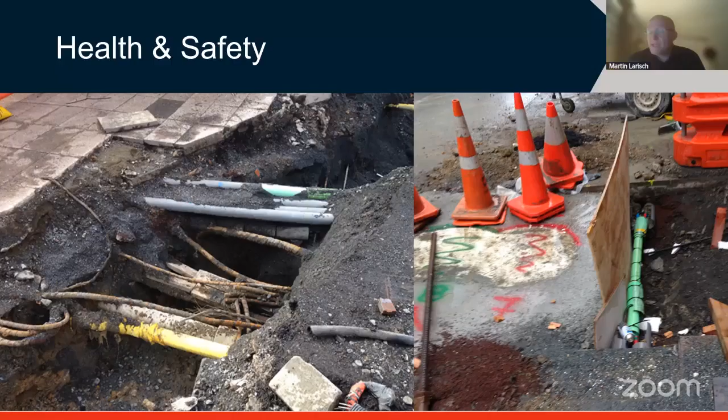I want to start with a bit of health and safety from own experience. We're drilling holes in the ground, and we have to make sure that we don't hit any assets or underground structures. I've worked mainly in Australia, New Zealand, and 5 years in Germany. But sometimes we find that the services are not located where they're supposed to be, and it can be very dangerous for the piling crew and the public to hit these services if undetected, causing significant damage to health and safety and to assets.

So really want to start at the basics. When do we need foundation piles? Usually in piling, we transfer structural loads into deeper and stiffer soil or rock layers, and we want to achieve an adequate load displacement behavior of the foundation. We only use piles for foundation of structures if a shallow footing can't provide these load displacement behaviors, whether under static or seismic conditions.

We will look into basic piling techniques used in Australia, New Zealand, and probably around the world. I really focus on bored piles and driven piles, and just explain the main design and construction principles.

Based on my own experience, I'll also highlight what can go wrong, how we can significantly over and underestimate the pile behavior, and I'll try to provide a perspective on the influence of installation effects and pile verification methods. Many years ago, I did my PhD on pile installation effects, because as a young engineer I was on site and couldn't understand, on some projects...

We did the thorough design, the thorough investigation, the thorough design, and then we did the testing. The pile load test results were different than expected, even though the ground conditions were similar. We back analyzed the load testing results and saw that in certain soil layers, the soil resistance was significantly lower than expected and lower than in textbooks. Then I did a lot of trials and finite element modeling to find out what happens, and I will share a few of these findings today.

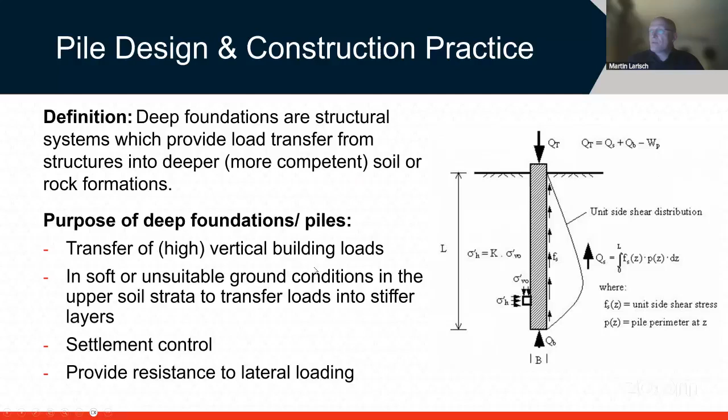If the piles are spaced adequately, usually 2.5 to 3 times their diameter from center to center, they will act as individual piles, transferring the load through shaft friction and end bearing.

We can have combined pile groups. It's a bit more complex, so I won't cover that. We call them mixed foundations, where the underside of the slab also contributes to the load transfer. However, this requires that the settlement of the piles and the slab is the same. If I found my piles in rock, they'd have a much stiffer response, and a pile-raft foundation wouldn't work, but we won't cover that.

Then we have rigid inclusions, a ground improvement method that Dr. Derek Egan spoke about in a previous lecture. Even though we install concrete columns with piling equipment, with rigid inclusions we don't connect them to the structure. The structure is designed with a shallow footing, and there will be a gravel raft between the underside of the slab and the top of the inclusions. The rigid inclusions improve the ground, so typically these elements are not directly connected.

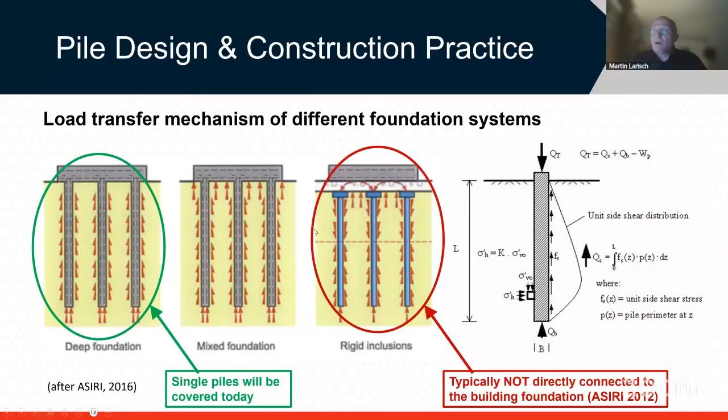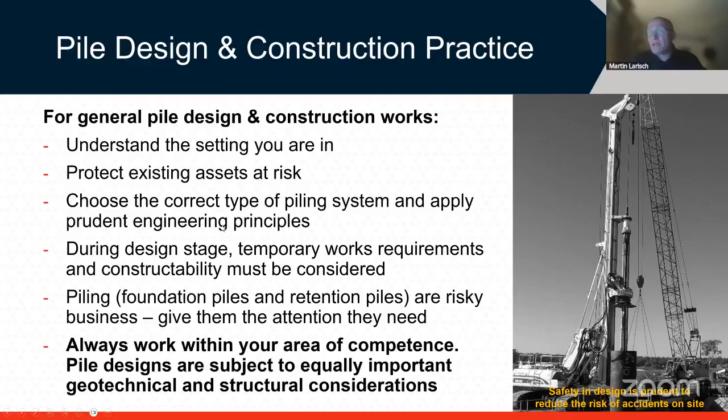If your structural competence or geotechnical competence is still fresh, reach out to your colleague or your boss and ask questions, and don't overestimate. Be brave, be bold, but also be very careful and use the opportunities to learn.

Starting with ground conditions: what's the complexity of my site, the geotechnical complexity? If I don't have any boreholes, this is probably a high risk, and I have to rate that. This affects my geotechnical strength reduction factor, or my factor of safety. The more risk I accumulate across these, what are 8 different assessment types, the higher my risk and the higher my factor of safety. It's a really good assessment.

The same thing applies to the extent of ground investigation. One example: sometimes we went out on a piling job and did deep piles with rock sockets. We did a lot of investigation of rock, but then for certain instances the building changed and we had to use stone columns or ground improvement. The rock was not of interest because the stone columns would not penetrate into the rock. So we had a lot of boreholes with rock socket samples, but no meaningful investigation of the soil above that. So even though the extent of ground investigation was high, the amount and quality of data for my task was low. Really assessing these things matters.

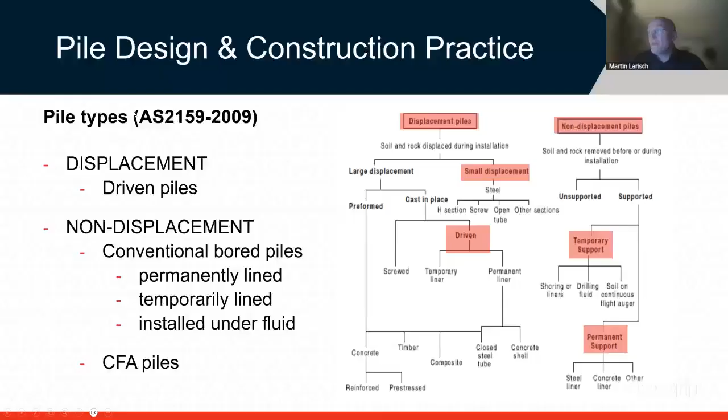Contrary to that, non-displacement piles like bored piles - you drill a hole in the ground and relieve the stresses - in these cases you may get lower strength, you may reduce the initial strength of your ground, and then you have to think about the support, which we'll talk about later on.

I don't want to get too much into ground investigation, but a rule of thumb is it's good practice to go about 3 to 5 pile diameters below your anticipated pile toe level. You may think, hang on, I don't know how deep my piles are going, I haven't done a design. But even if you start somewhere, do an initial design - if you have your values for a 10-story building, you know from experience, for example, I have 50,000 kilonewton overall load for a building like that. You have about 100 piles, you divide 50,000 by 100, so 500 kilonewton per pile.

If you know your ground condition, you can say, yeah, about 10 meters, 12 meters deep. And if you then say, look, your boreholes, probably assuming piles 600 millimeter diameter, if you go 3 meters deeper, you go to maybe 18 or 20 meters, or a little bit deeper depending on your ground conditions.

And maybe stagger your investigation. Tell your client, look, I use 60% of the budget for an initial investigation. And then when we find areas and pockets where we say, oh, we have to go back, we take the rest then. So this is very important. We can use boreholes, we can use cone penetrometer testing or other methods.

Usually, if we get boreholes deep enough, we get information about soil types, soil layers, groundwater, any areas where we have core losses, where we don't retrieve any soil samples. Could be a layer of cobbles or very soft soil. That's very important for the designer.

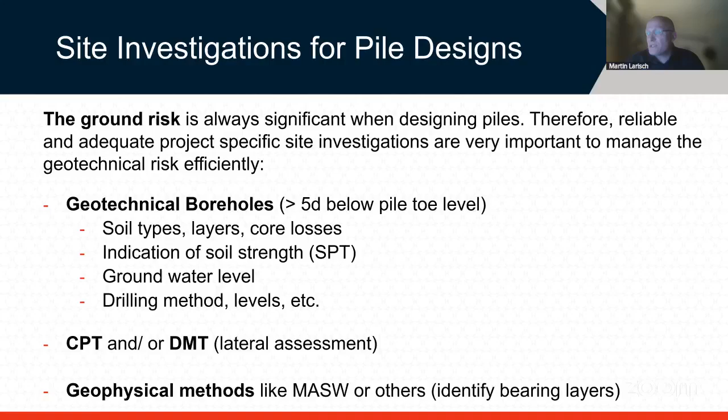The key parameters for my axial and lateral pile design is really I need to understand my soil type. Is it granular or cohesive? How many layers do I have? What's my soil behavior? Is it drained or undrained? Usually for long term, I would always recommend to use drained behavior.

Liquefaction risk if we're in seismic areas, if applicable. And I just noticed that there was a 5.0, 5.6 earthquake in Brisbane earlier today, and I worked in Brisbane for 12 years, and there was always saying, no, there are no earthquakes in Australia. And I went to New Zealand, everything is designed for earthquakes with big seismic hazards here, but Australia is not prepared for that, so they suddenly probably have to start rethinking and say, look, what is it? What does it mean? A 5.0 earthquake will trigger some liquefaction. But again, that's a different story.

Soil cohesion, I would usually assess cohesion with great care because it can be variable. It dominates strength at low depth, close to the surface. If your cohesion values are too high and you get a rain event, or your soil due to movement, the stiffness weakens, then we may get lower values, and that could be less beneficial for your pile design.

Sometimes we need soil permeability, mainly for durability assessment, if you have contaminated water or salt water that may attack the pile material, the steel or the concrete. Poisson ratio in some instances, on the soil model if we're getting more sophisticated.

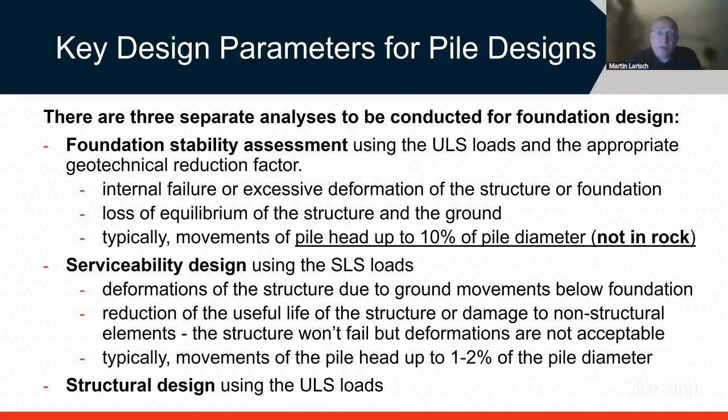It's a more complex question, but my first consideration would be to address this in your site investigation, and then design your basement accordingly. I hope that's helpful.

If we look at the fundamentals of axial pile design again, that was the foundation for a high-rise building with 2.4 meter diameter piles.

Dr. Martin, can I interrupt? Just to remind you that the continuity of the lecture is important, but questions are also important, so wherever you feel a question should be answered, you're free to answer it, or it can be addressed later during Q&A. Whichever you prefer is up to you. Okay, thank you, perfect.

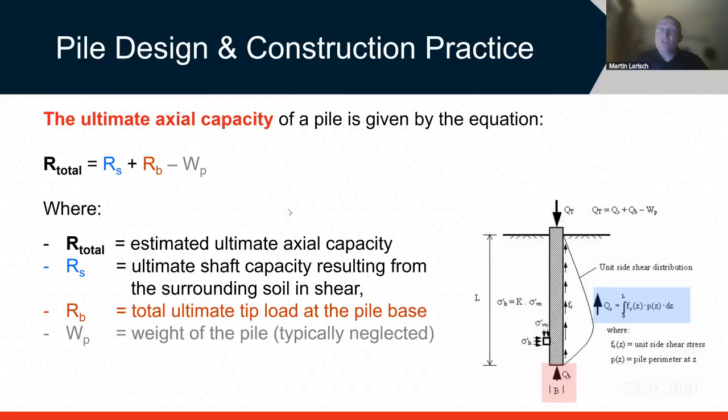All right, if we then look at the basics of effective stress design of axial pile capacity: my total geotechnical resistance is my shaft capacity resulting from the surrounding soil in shear, plus my ultimate tip or base load. I have to deduct the weight of the pile, but very often that's neglected in my experience.

If we look at limit state design, my R_g, which is my geotechnical resistance of the pile, is similar to my structure design action effects. This should be the product of my geotechnical strength reduction factor, which we often start at 0.5, multiplied by my ultimate geotechnical pile resistance. This shows the importance of the geotech strength reduction factor.

If my structure load is 1,000 kilonewton, with a strength reduction factor of 0.5, my pile needs to be designed for 2,000 kilonewton geotechnical ultimate resistance for ULS. If I do some load testing and increase my strength reduction factor from 0.5 to 0.65, I only need 1,540 kilonewton resistance. Depending on soil condition, I can cut out about 25% of resistance, so in some ground conditions that could mean I shorten the pile by 25%. Instead of a 20-meter long pile, I may only need a 15-meter long pile, which can provide significant savings for the project.

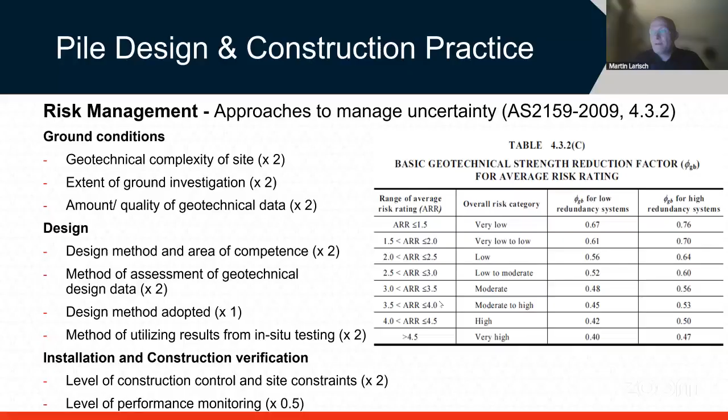If we look at shaft resistance for axially loaded piles, this is usually the first component of resistance to be developed. Initially the shaft resistance is elastic, fully recoverable, and normally in soil, if we get 1 to 2% of the pile diameter in downward movement, we fully mobilize it. Again, it's a rule of thumb, not a fast rule, just an estimate that needs to be confirmed by load testing, but it can vary in different ground conditions.

If I make an allowance for certain shaft resistance, how do I verify that, particularly in rock and soil for bored piles? This very often happens through verification and rock socket cleaning, which can make a very big difference. For continuous flight auger or CFA piles, it can be the penetration rate. As a designer, I always start thinking, particularly if my pile design is a bit more aggressive, how do I verify that on site? Again, it's a risk - if I use more aggressive parameters, I need to make sure I can verify that on site. Just assuming I can use aggressive parameters without verification is a risky game.

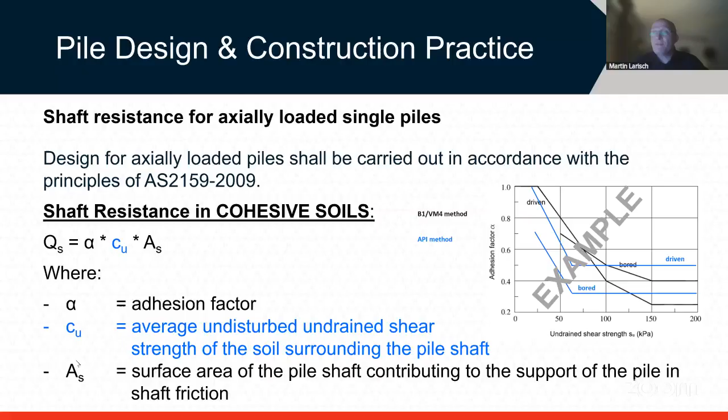This is very important to consider in pile design. The methodology and the standard and the safety concept you use can have a significant impact on your pile design, even if the formulas are so simple like the alpha CU method.

If we go into granular soil conditions, we have the beta method. It's basically an effective stress method. So we have effective pressure at shaft midpoint, and then we have the average value of pile-soil friction angle and the coefficient of horizontal stress. There are some values from, for example, US Army guidelines or other codes and standards, and we can lump this Ks multiplied with tangent delta to a beta value.

The key thing here, which is very often forgotten, is this is effective stress, and it needs to be equivalent to or smaller than your limiting value of shaft resistance.

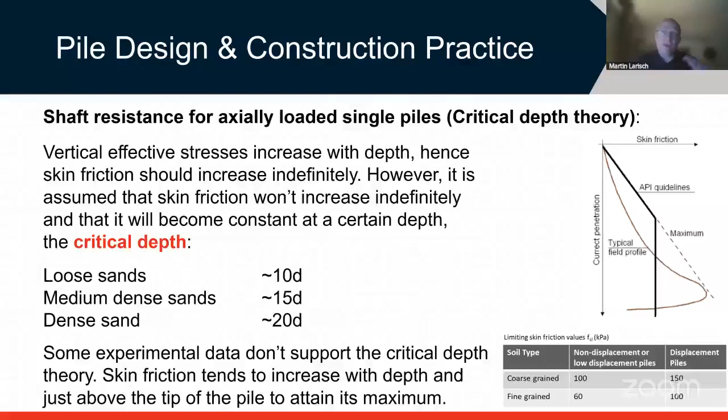There's other research, the brown line, that shows basically the resistance at the toe is almost like the effective stress over a short period of the depth. But if you would consider the area beneath the curves of the black one and the brown line, it would be approximately the same. So again, it's really important to consider these limiting values for effective stress design.

And we will come to the selection of NQ parameters in various ground conditions for drilled shafts in a minute. We then look at end bearing for axially loaded piles. That's usually the second component of resistance.

Its nonlinear behavior can be more tricky to model by linear elastic soil models. Usually it generates bearing failure, and we say it's about 5 to 10% for driven piles, and could be up to 24% for bored piles. The reason for this variability is that with driven piles, we can improve the ground conditions beneath the base by installation effects.

It's not always possible unless we can prove it. I would not allow for it in the design. The key things for me as a pile designer are really, how do I verify particularly the cleanliness of the pile base? If I have 200 mil or a foot of base debris sitting on my pile, and then I pour concrete, I have a sandwich, and when the pile gets loaded, the shaft friction is mobilized, and I'm waiting for the end bearing to mobilize, and the pile has to squash through a foot of debris, it will move. This is really, really critical.

Or verification of set and temporary compression for driven piles.

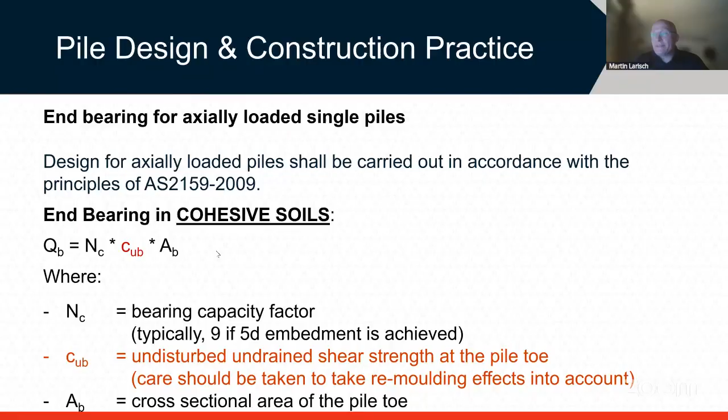We look at end bearing in granular soils, and we look at the NQ values, the bearing capacity factor, empirical. It's a function of the bearing capacity factor and the vertical effective overburden pressure. And if we look at different authors, different publications, these NQ values can vary significantly. Again, this is the estimated resistance based on the bearing capacity factor.

Keep in mind that using these values, for example, if I'm in dense sand, my bored pile is 1 meter in diameter, then I take the area of my bored pile multiplied with 5. But that means my pile needs to move about 100 millimeters when founded in soil in order to activate that. If it can only move 50 millimeters, for example, because otherwise the building would be damaged structurally if the movement would be too high.

This needs to be reduced. We see that a lot in earthquake engineering, when due to soil liquefaction the shaft resistance basically disappears, and all the load will be transferred to the base, so we may get bigger settlements, and the structure needs to accommodate that. So this is one of the key things.

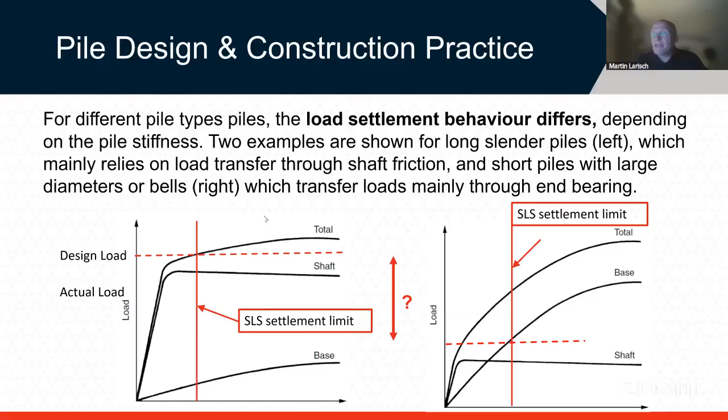Again, it depends on my structure, my loading, and my ground conditions. But again, the formulas themselves don't have to be complex. It's probably thinking around it, how do I accommodate that best and make that work for my building.

And so that means above the neutral plane, the settling soil will hang itself onto the pile and basically drags it down. So I get additional loading from these ground conditions. When can that happen? Newly placed fill materials, so reclamations very often, or fill on compressible soil. If I have an embankment of 5 meters high, and a very soft soil below, it can settle due to the additional loading. And if I have piles for bridges, for example, the settling layer can apply down drag forces.

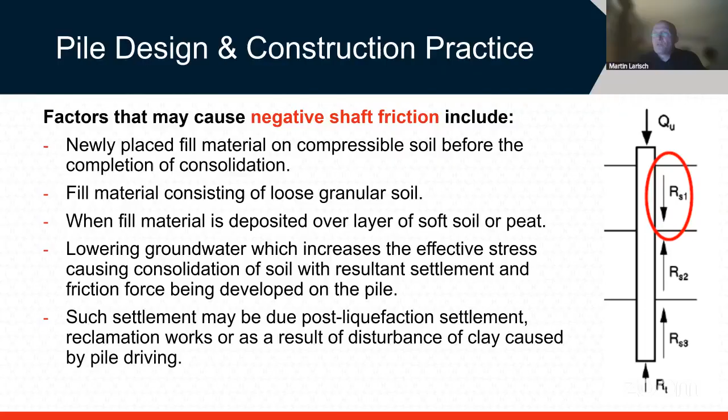So we will introduce an additional axial force in the pile - it's drag force - and this can cause additional settlement. Usually the capacity or strength is not affected, it's more a settlement problem. So it's an SLS problem because we will increase the settlements. And we also need to consider this additional down drag force in the structural code. For example, AS 5100, the Australian bridge code, we have to apply a factor of 1.2 onto my down drag forces, and that needs to be allowed for in the structural design. Drag settlements should be considered in the SLS assessment.

Very briefly, what we can do is apply bitumen coating in areas where we expect the layers to settle, so we won't get a lot of shaft friction for resistance. But on the other hand, if we have down drag problems or negative shaft friction, the soil can't hang itself onto it, and we basically have an almost neutral section of pile in these layers. We can also put some sleeves around it, like we see here.

Again, there is no right or wrong, it depends on your project. Sometimes there's a bit of hesitation when we say, if you put bitumen on your piles and drive them, particularly in sand, won't you rub it off? Again, I've seen that a few times where when we extracted the piles, they looked pretty good. So again, there's no right or wrong, but as a designer, considering that, thinking about that is very important.

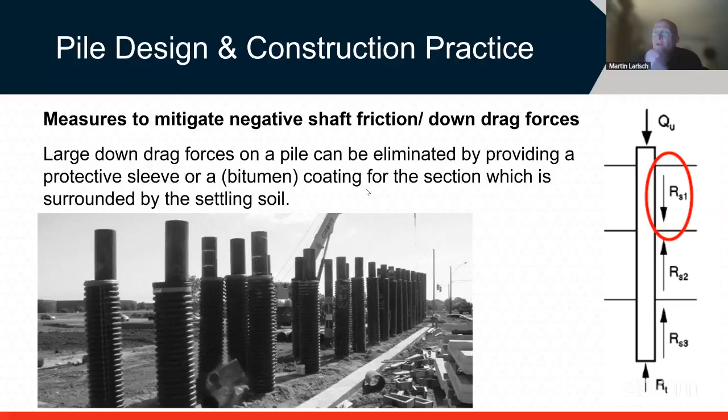A bit of a summary of axial pile design. In your selection, include structural and geotechnical considerations, constructability effects - we'll talk about that shortly - and any project-specific boundary conditions. Understand your settlement limits. If you don't understand them, just develop them. You need to know your pile settlement limits.

Understand the difference between drained and undrained pile design. How reliable are your design parameters, and how realistic? How robust is your ground model? And if you do your sensitivity checks, understand the behavior of your pile foundation. What is your contingency? What if the ground is far worse?

Understand that in your design. Pile design strongly depends on local geology and site-specific installation effects. Ensure your risk assessment covers these risks. And again, verification of design through pile load testing may provide considerable advantages, not just for the designer to know that their parameters and settlement assessments were right, but also for current design and future applications.

All right, if we look at rock socket designs, I've done a lot of rock socket drilling, mainly in Australia. Where we have rock sockets, very often we ignore the resistance of the soil above the rock for the pile design. One reason is that usually the rock provides much higher resistance, but another, more practical reason, is the pile needs to move far less in the rock in order to fully mobilize the resistance. So we're not talking about 1 or 2%, it's far less.

This means if my pile only moves a little bit, maybe 20-25 mil - which is usually, in my experience, what we allow for SLS settlements in soft rocks at least - these settlements can be very small and the response is much stiffer. So the soil above the rock socket is really not mobilized adequately. Typically rock strength controls the skin friction and bearing performance, so strength is usually used for the design of rock sockets. But if we really look into it, depending on the project risk, we also have to apply rock modulus and other parameters.

The key thing with rock socket design is really to have clean pile bases. If we have debris due to drilling, if the contractor doesn't clean out the base properly, that won't reduce the bearing capacity of the rock because it won't damage the rock, but it will create additional settlement. If you have a layer of 200, 300 millimeters of debris, then your pile's shaft friction is maxed out and it goes into the ULS case. This is when your pile needs to work hard, like your life insurance. It needs to move 100, 200 mil to compress this soft layer. Ask the structural engineer what they think about another 100 or 200 mil of movement.

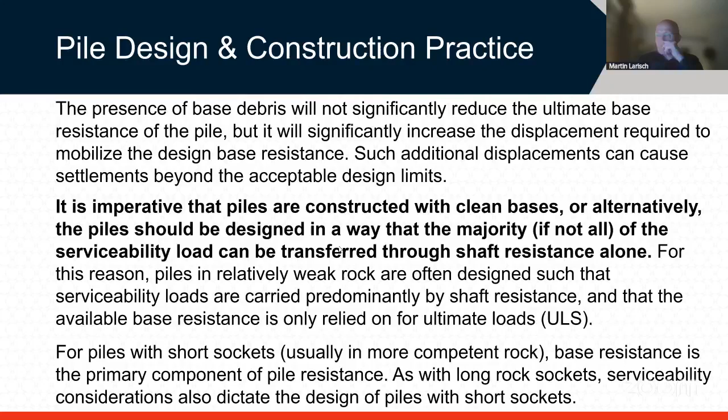The roughness of the rock socket is very important, and again we should think about evidence. How do we rely on that? If we have dry rock, we can lower a mirror and look at it, or lower cameras down these days. If we have bentonite fluid, there's not a lot we can do. I would not recommend using bentonite fluid for rock sockets, definitely not, because the bentonite will create smear. And the smear, when you roughen your rock socket, will basically look like plaster on a wall, making a very smooth socket. You can reduce your resistance significantly, by probably 2 or 3 times, from your best option.

This is really, really important. Think about the evidence. How do you prove that your rock socket is clean and adequately rough? You're not sure. For some hard rocks, it's not possible, so you have to assume smooth resistance, but then you get higher friction values as well because the strength is bigger. Load testing always helps, and the assessment of rock mass modulus, intact rock strength, and base friction angles is very important for detailed design, particularly for higher strength rock. That needs different investigation, with people who have knowledge about these parameters and what they mean, and it gets more complicated.

Looking at lateral pile design, there are some questions. Probably if we wait till the end, if this is all right, they're a little bit longer. If we look at laterally loaded piles, again, I'll keep it simple.

We rely on a non-linear relationship to provide soil resistance as a function of pile deflection, and very often we reflect that through a series of springs. We'll focus on the principle of lateral pile design and understand that these simple methods also contain limitations. When I look at lateral design, I come up with a lot of different challenges because soil strength estimates and soil stiffness response are not linear.

For the axial pile design, I haven't spoken about stiffness. Again, with the simple methods, in my experience we probably use on 80% of our pile designs, we don't use stiffness, we use strength parameters. In reality, the whole time when I talk about settlements, we're talking about stiffness, the strain response when I apply a certain load. With lateral pile design, this is all about that. So suddenly we are talking stiffness, and this is when things get slightly more complex.

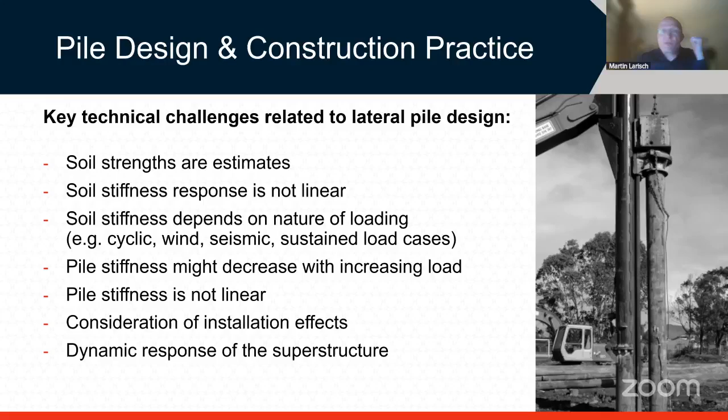Soil stiffness depends on the nature of loading, cyclic, wind, seismic, sustained load cases, depending on ground conditions. My pile stiffness is not linear, particularly if the concrete pile starts to crack over time, just microcracking, what reinforced concrete does. The stiffness will change. Consideration of installation effects and dynamic responses of the superstructure, even under light earthquake loading, wind loading, or other things, need to be considered.

This is quite important. We look at limit equilibrium based on Broms, again not going fancy, and then soil structure interaction. Limit equilibrium can be very popular, particularly for smaller jobs or low-risk jobs, and we look at the right-hand side. These are the assumptions of how your piles will either rotate through the soil as short piles, as a rigid body, or as longer piles with bending failure of the pile, followed by local displacement.

So even if we look at short piles that translate through the soil, it's not realistic. And again, if you think this is not realistic, don't use these methods. For low risk, smaller projects, they may be appropriate, but again, you're just doing ULS checks. With these methods, even though with Broms you can assess your displacements, they remain ULS checks.

Again, they're easy to use. You can put them in an Excel sheet, it's very straightforward. But the price you pay for that in your design is accuracy, because they don't really include the flexural stiffness of the pile, and piles don't act as a rigid body.

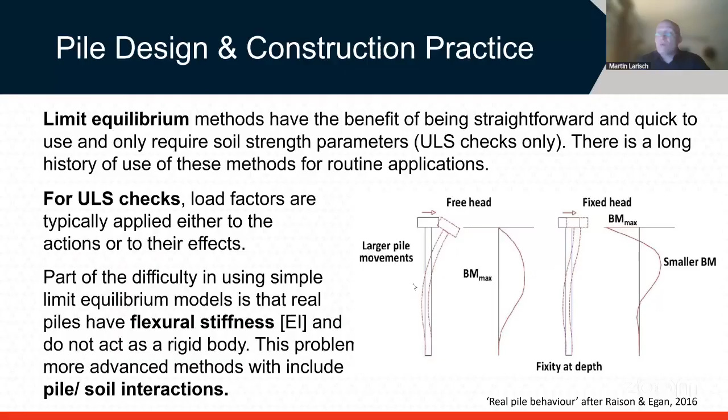In order to solve that problem, we should use pile-soil interactions, or PY curves. Looking at the right-hand side, this is from a paper by Raison and Dave Egan, 2016. Depending on my head fixity, if my pile head is free, like a dolphin pile or a power pole, it can move freely, and my bending moment is somewhere along the pile shaft. If I fix my pile head, and probably 90% of piles are fixed in a slab or beam, my biggest bending moment is at the pile head, with a smaller bending moment at the shaft. I can then get more realistic displacement curves for my piles.

Again, it's not rocket science. We can use software like LPile or RSPile or others - I'm not affiliated with any of these software companies. Or what we've done is build spreadsheets, which also works. You can come up with correlations and basically build your own PY curves, ideally based on static load test conditions.

It's very important to do a sensitivity check for lateral loading on the springs. Usually we use our best estimate, then try 50% and 200%, and just see the difference - how robust is my model?

When I look at lateral pile design, I usually obtain structure loads from the structural engineers and displacement limits. If you don't have any displacement limits for your lateral pile design, it's almost worthless starting the whole process. You probably do a best shot and say, look, it's 25 mil - if it's less than 25 mil, in most cases it's all right. If it's more than that, probably go back and ask for more data.

Assess the soil profile and soil strength parameters, then select your lateral analysis method - could be limit equilibrium, pile-soil interaction, or maybe finite elements. It's worth it, but if you do finite elements, think about whether you have the right parameters. Select pile head fixity, stiffness parameters, allowable deflections, and check if that all lines up nicely.

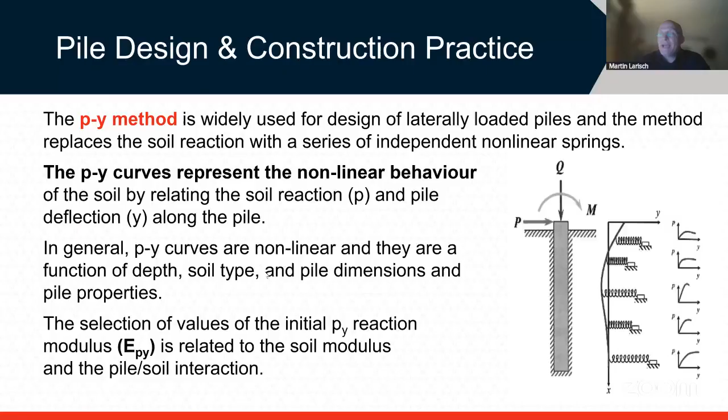They're driven by this reaction modulus, EPY, which is related to the soil modulus and the pile-soil interaction, and that depends on your limit or your allowable deflection. So if your deflection increases, your EPY modulus changes as well, and you're just turning yourself in circles, chasing your own tail. EPY is the resistance from the soil at a point along the depth Z of the pile, divided by the horizontal deflection of the pile at that point, and that represents this curve at this point. They develop a specific depth showing soil reaction modulus, obtained by using the secant of the PY curve - and again, you need to know where your deflection is.

These curves are influenced by pile type, geometry, flexural stiffness of your pile, and also type of loading - monotonic or cyclic. In some ground conditions, if you have cyclic loading, you can double your displacement just by the nature of the load.

And of course, pile head fixity is very important, and it's sometimes not easy - it's not 100% fixity or 0% fixity. Sometimes you have partial fixity, and this could be a problem. But again, it depends on your project.

If we look at the lateral analysis of piles, a bit of summary - lateral analysis is more complex than axial analysis. We can use Broms or limit equilibrium methods, PY curves, or appropriate software if available. If we have repeated load applications, they may increase the lateral deflection to about twice compared to constant loading.

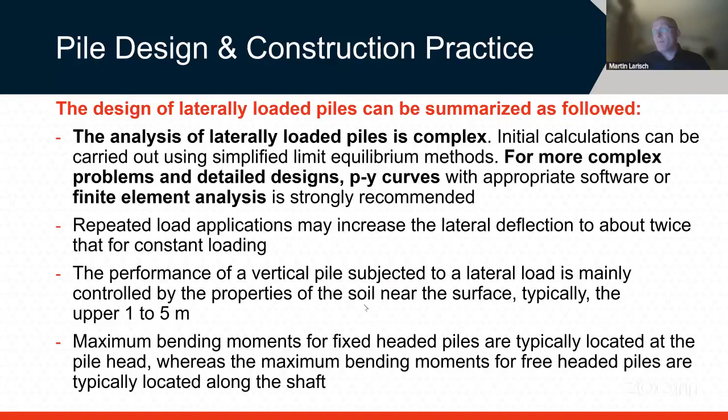It's important to look at the construction site and see if the crews building the piles really follow your method of providing fixity or non-fixity. Because if you design your pile with a maximum bending moment at the head, and the pile doesn't have fixity, your bending moment will actually be along the shaft, and your reinforcement may not be adequate. So this is really important.

All right, let's talk about conventional pile construction - speaking about bored piles, where we basically drill a hole, put a reinforcement cage in, and fill it with concrete.

We can leave steel casings, like we see on the right hand side, in the ground permanently. For marine piles that's very appropriate, and rarely in other occasions, because for marine piles, if they stick up above the seabed, the casing at the same time acts as formwork for the concrete. Sometimes we have permanent casings we can take into account for the design, or we can leave the casing in the ground - it's called a sacrificial casing in my part of the world.

And then they said, yeah, you can have it, but you can't take it into account for the design because it may corrode over the design life.

In some instances we don't need to leave the casings in the ground, so we use short starter casings. Very often we use that in combination with drilling support fluid - so we have a short starter casing, drill the pile, excavate the hole, top it up with drilling support fluid, usually bentonite, polymer, or in some occasions water. Drill to the base, clean the base, install the cage, pour the concrete.

So with bored piles, or piers as they're called in the US, or drilled shafts - we drill a hole first, inspect the hole, inspect the cleanliness of the base, then install the reinforcement, and then pour the pile.

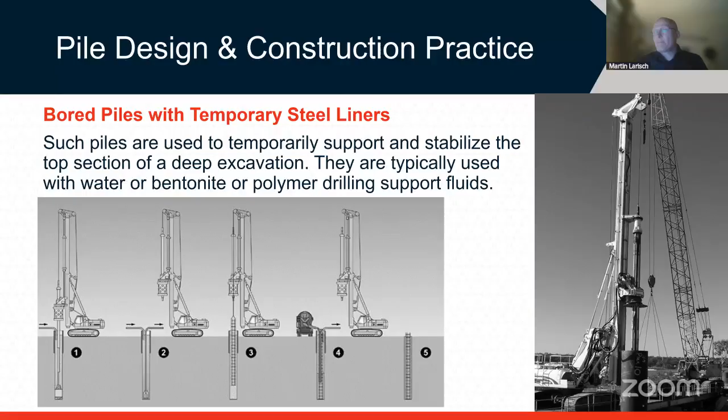Extremely flexible system, up to 3 meters in diameter. I'm just reviewing the final design for a big bridge in New Zealand, where we used 19 3-meter diameter monopiles up to 35 meters deep.

They can be as small as 450 millimeters - very, very flexible, very good capacities, lateral capacity, bending capacity, can be installed with limited noise and vibration issues, usually higher load capacities than driven piles.

We may need increased quality assurance and inspection, particularly to verify the ground conditions, storage space for pile reinforcement - insufficient base cleaning may cause reduced capacity. And we may need temporary support like bentonite or polymer.

Question: talking about loss of pile loading capacity due to poor slurry control or poor base cleaning - what is your experience with loss of pile capacity due to time delays? Oh, that's a big problem - between end of drilling and start of concreting. I don't have any literature references about that.

Just developed the New Zealand piling standard, currently under public review, but we usually say 24 hours between cleaning - basically opening your socket and finishing the pile. There is no real answer - it's very tough to say, look, what if we have the parameters if we have 48 hours?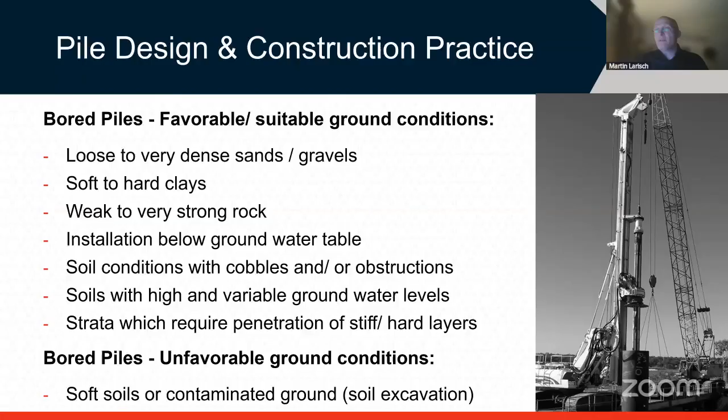Drilling support fluids - we'll talk about polymer, bentonite, and water in a minute. Just checking base cleanliness, there are measurement devices where you have a tape measure and put a piece of steel, could be a plate or a piece of reinforcement at the end, and you tape it down. When you reach the base you'll find it stops, and from there onwards it may sink in. Depending how much it sinks in, we usually limit it at 50 mil, because we think when we place concrete with the Tremie method, 50 mil of base debris is enough that the concrete, when it flushes through the Tremie pipe, will flush the pile base and be in firm contact with the soil.

If it's more than 50, probably some of the debris will remain in place, particularly in the corner sections of the pile, and that may cause a problem. Usually we tap at the four quadrants and the center, in accordance with the specification, the spec for piling and embedded retaining walls from 2017.

If we look at excavation support for bored piles, very often we need support: permanent steel liners, temporary steel liners, or drilling support fluids in combination with temporary steel liners. So we also need to think about how these casings affect my design.

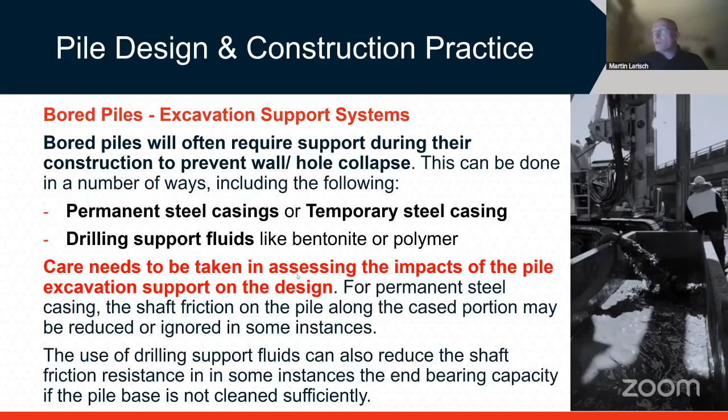A few words about permanent steel liners. In some instances, if we have steel liners and we have to penetrate harder layers, we need driving shoes. These are basically welded steel sections at the base of the casing, which are thicker. My casing may be 16 millimeters and my shoe may be 25.

If my shoe encroaches to the outside, so it's slightly thicker than my casing, contractors will love it because you drive it down, screw it down, and it will break the skin friction. Because the shoe is bigger than the casing, there will be an annulus, no skin friction, and we can install it easily. If I keep the casing in the ground, it's a nightmare because I have zero skin friction. And this is the key thing.

For the design, I want the basic driving shoe encroaching to the inside. If I want to allow for any resistance, contractors may not like it because they may say, no, if it encroaches to the inside, my drilling tools may get stuck. Please specify that if you design on the drawing. This is very important. I've seen jobs where we had to disregard 20 meters of skin friction, and of course the pile was under design and it was a nightmare. So we had to install additional piles and all other things.

We then look at drilling support fluids, and we will talk about bidirectional static load test towards the end of the lecture.

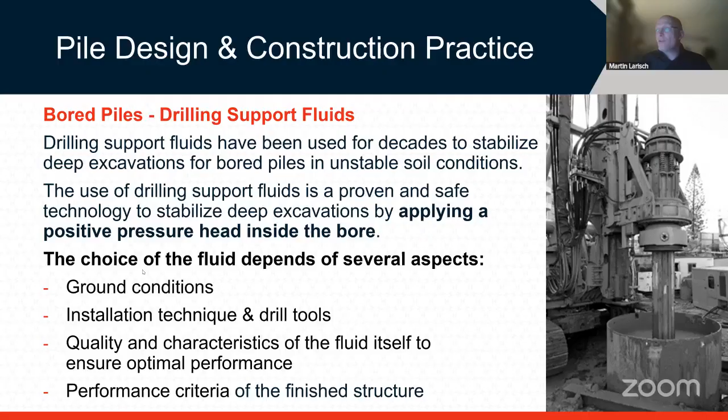Drilling support fluids, depending on ground conditions, what support fluids we can use. Installation techniques, drill tools, again, the fluid itself - use high quality fluid if possible - and performance criteria of the structure.

The key thing for any drilling support fluid is we need to apply a positive pressure head. Rule of thumb, at any time the fluid must be 2 meters above the groundwater level, at all times. If it only drops temporarily below groundwater, a few seconds may be enough and your sand or something will cave in, and then you have a big problem. So this is the key thing.

We can use water, bentonite, or polymer. Water is rather rare. We use it when we basically drill our casings into the rock mass, embed it, provide a seal, then we drill the rock socket uncased. With water, you can clean your rock socket - that's the best thing. Some water may seep through the rock, or if you have marine piles, water will penetrate, but this is usually the case.

Bentonite is a mineral slurry, basically clay powder. We have to mix it with a high shear mixer and let it hydrate 12 to 24 hours. Then the bentonite, with a 2 meter pressure head inside the pile, will apply pressure onto the formation. If it's sand, for example, some of the bentonite will disappear into the sand, but because it has these hydrated clay particles, they will block the voids in the sand very quickly. Then there will be this buildup of filter cake inside the pile.

Depending on your bentonite quality, this may be thin or thick - you want to get a very thin one. And then your borehole is open. Bentonite works best in gravels and sands. Bentonite needs to be circulated and cleaned before concrete is placed. If there's too much, more than usually 4% sand content - could be 2, could be 4, depending on the standard you're using - you may get inclusions on your reinforcement, and that's a very nasty defect.

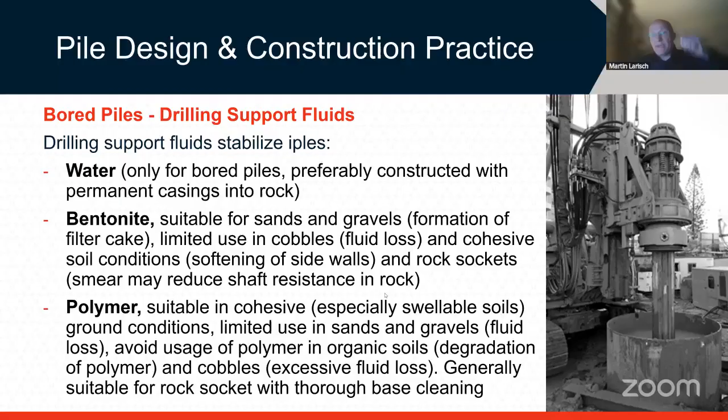All right, so what are the effects? We have 25-meter gravel filled on the jetty on a seaport. What is the best way for bored piles? I would say lined piles. Whenever I see seaport, and if they're in water, probably lined bored piles. But it's very difficult to give advice without knowing more details about the job. Usually for marine jobs, very often the piles are cased or permanently cased.

Just an example to show what I meant with sensitivity and robustness of the design. So if I have my bored pile in clay, my best estimate is 35 kPa shaft friction, 10 meter long pile, 450 mil in diameter, base resistance 3 MPa. What about the shaft resistance? That's my best guess, the red line.

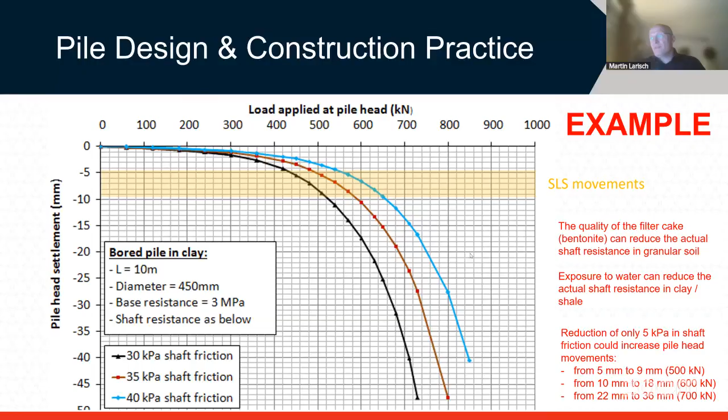And this is what the structure sees every day, and you rely on shaft friction. This is the problem. Probably a lot of the load will then be taken by end bearing, and this is what triggers the additional settlement. This is why it's quite important to also look at your settlement and your SLS behavior.

It's a bit of a table about suitability of water, bentonite, and polymers in different ground conditions. And there's also the guide to support fluids for deep foundations from the EFFC and DFI that can be used.

Just a slide about rock drilling of bored piles. One way of doing this is with brushes, particularly in high strength rock where you have the risk that your drill spoil may basically block the roughness of the rock socket. This way, in dry holes, may work very well.

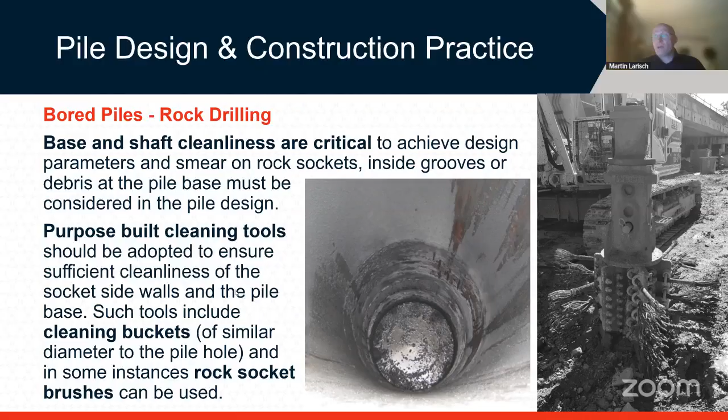All right, a few words about concrete. In my work as an independent expert, I came across probably 80% of all piling defects related to concrete. It's not so much about drilling, it's about base cleanliness - let's say a third base cleanliness, roughly two thirds concrete in a nutshell. And of course, there are the special cases.

Why is tremie concrete more different? Board piles can be deep, and the concrete inside the hole, when it's filled, particularly with bentonite or polymer, fills up from the bottom up. That means my first concrete poured in the hole will always stay at the top, and it has to rise upwards slowly, slowly, slowly. How long the pour takes, this concrete needs to remain workable.

Concrete is also subject to high pressure. So basically, when I have a 20-meter deep pile, due to the self-weight, the vertical stress the fresh concrete will apply on itself, close to the base, could be up to 5 bar, 500 kPa pressure. So that needs to be considered in the design - it needs to be self-leveling, must easily flow around reinforcement bars, and also must achieve bond with the bars.

And we talk about workability and stability. Workability means it needs to move rather quickly laterally in order to flow through the reinforcement cage to fill the cover zone. Stability is the resistance against segregation mainly.

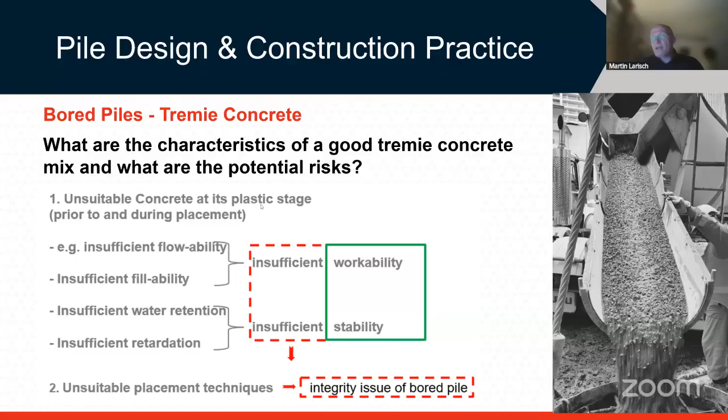The concrete is too sticky, so if it doesn't work very well, the lateral flow is blocked, and it may not flow through the reinforcement cage, particularly the top 5 meters, where you don't have this concrete pressure head. You may end up with some issues in the cover zone. I've seen that a lot, and it can be a very painful exercise because your durability is not given in this section.

And how do you assess how deep down it goes? Congested reinforcement can also be a problem. Sometimes it's easier to increase the pile diameter a little bit, or increase the spacing of your reinforcement a little bit. Even though it's a higher cost in material, it's probably just a fraction of the cost compared to investigating defects and redrilling piles later on.

Usually we say we need concrete fines, and I did a lot of research on that: 25 to 30% of fines passing the combined grading curve at 600 microns. Very often this is forgotten. You really need your fines, not too many, but not too little.

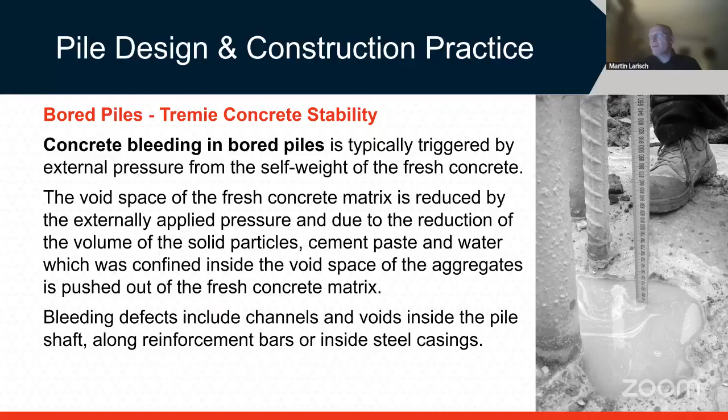If we look at concrete bleeding in a bored pile, that's a nasty bleeding channel. This is when the concrete doesn't hold up, and when you basically pressurize it, the water moves upwards, washing a channel into your concrete. Very often it rises up along the reinforcement bars, and that's a problem.

There's a filtration apparatus, the Bauer filtration test. Basically a little steel tube, you put your fresh concrete in, put a lid at the bottom with a little hole, then put a lid at the top and apply pressure. Usually we say 5 bar for a standard 20-meter deep bored pile. Leave it there for 5 minutes, then measure the amount of water that drops out. Based on that water, there are correlations with your Tremie concrete guidance that tell you what's acceptable and what's not.

Then you open this cylinder and pour it into a bucket, and what you see is basically a 300 millimeter, 1 foot high stiff concrete. Imagine this is how your concrete looks at 20 meters depth. Do you think it will flow through the reinforcement cage? Probably not. What's the slump of that? Maybe 80, maybe, I don't know. But it's certainly not ideal.

So if we look at that, I'll come back to placement in a minute. But there are a few best practice documents. The first one, from 2012, was Tremie Concrete for Deep Foundations. I was involved in the development, and it came back with a few simple criteria.

Slump flow is basically the time it takes for the slump -- you lift the slump cone, and measure how long it takes for the concrete to stop flowing. We said less than 5 seconds is ideal; it needs to be quick. We tested 50 different mixes, all with 230 mil slump, and we had significant differences.

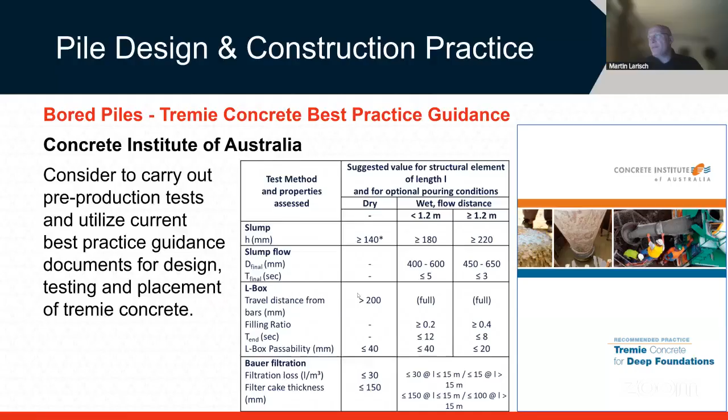And there's another one, the Guide to Tremie Concrete for Deep Foundations from the EFFC and DFI. The latest revision is from 2024; we released it in December. It's much more detailed, with more tests and very good background information.

Sometimes you need to check if the specified tests are available in your region. If it's a more rural job, they may not be available. This is why I sometimes prefer the Australian document, which is much simpler. But again, this one is a great document if you want to learn about Tremie concrete, and you can download it for free -- it's a good read.

Then for placement, this is a Tremie pipe. You basically put it in your pile, which is filled with fluid to the base, lift it up, and have a separator to basically cast your concrete. You have a rubber ball or vermiculite at the top, and then your concrete pushes it down the tremie pipe, and all the fluid inside the pipe will flush the base, because the tremie sits about a foot above the pile base, flushing up all the base debris, ideally up to 50 mil.

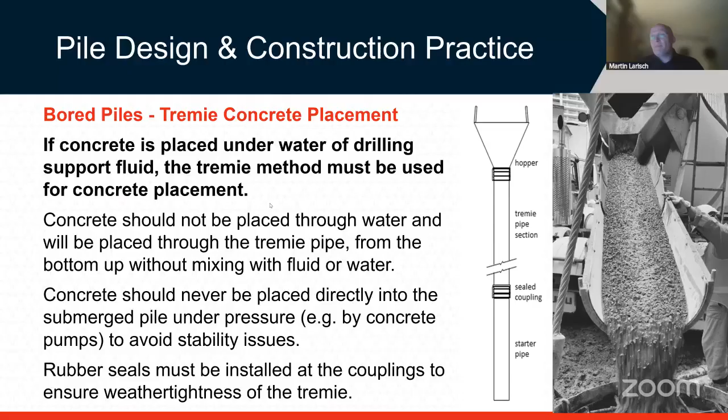Then the concrete is placed and rises up, and all this stirred-up base debris will settle on top of your concrete. If you move upwards, it will stay there, and this is why you have to trim it back -- they usually say about 300 to 500 mil of contaminated concrete. So that's quite important, and these documents will inform a lot about Tremie concrete.

Quick summary of bored piles: very versatile, can be installed with limited noise and vibration. Base cleaning is critical. When we use drilling support fluids, always maintain a positive pressure head.

Very briefly, continuous flight auger piles - not sure how popular they are in Pakistan. We see a rig here. It's basically another method to install a bored pile.

Rather than drilling fluids or casing, we use a hollow continuous auger with a sacrificial seal we drill into the ground. Then at the design depth, we swap to concreting and pump fluid concrete through the hollow stem, lift the auger, and then plunge a reinforcement cage in.

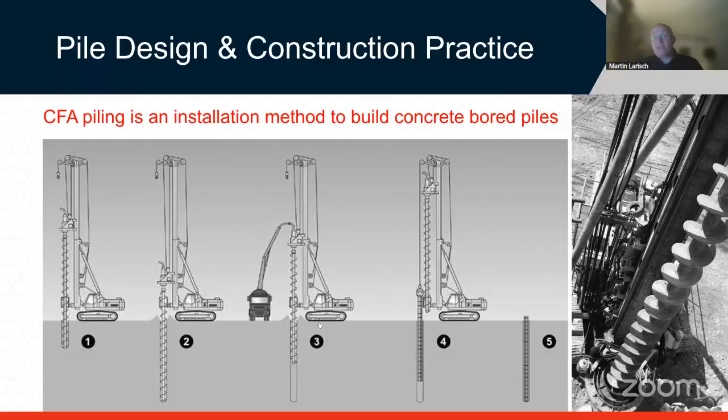The biggest risk is the plunging of the reinforcement cage. If it gets stuck, you may have a problem. If it's halfway in and you need a full-length reinforcement cage, you have a big problem.

Very efficient, much quicker than bored piles. You don't need casing, you don't need support fluid, minimum noise and vibration. The disadvantage is limited depth and diameter.

Spoil removal, think about that. Long reinforcement cages may be hard to install, and advanced concrete technology is required. If my penetration rate is too low, I may have over excavation.

So that means my auger spins without penetrating the soil, basically flowing inside my auger sideways. Particularly if I have an adjacent building, I may cause settlements, but I also reduce the strength of my soil in this layer. So that's one of the biggest problems.

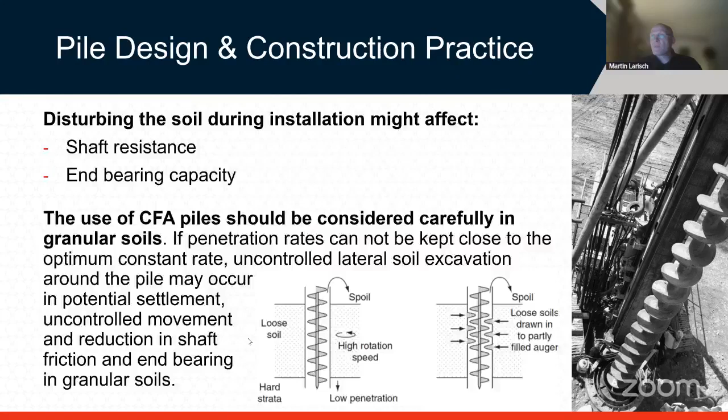CFA piles are normally fully monitored. There are computers in the rigs. They show you the penetration rates, the drill torque, the concreting rate. So it's a very important QA document, because you don't have the opportunity to inspect the hole. It's a blind process. As an engineer, I couldn't say when the reinforcement cage sticks out of the ground if the pile is 2 meters or 20 meters deep. I would not know unless I do testing.

Applications: retaining walls, foundation piles. If you do secant piles for shafts or basements, guide walls are required. I would never ever install a secant pile wall without a guide wall.

See an example on the left-hand side. When the piles kick out, they don't overlap. So you need secant pile walls for shafts or basements if you have high groundwater levels, mainly for groundwater management, or to achieve a certain waterproofing performance of your wall. If your piles kick out, you won't have that.

And I've seen horrible things during my career.

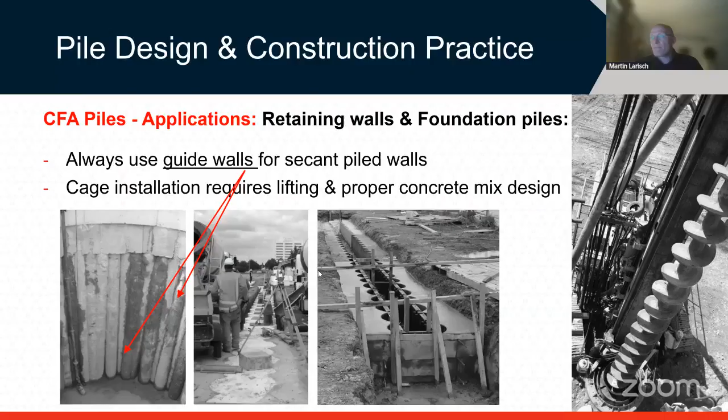For concrete, basically you need to spread concrete, very flowable ideally. On the right-hand side, you see the crew just pushing the cage into the fresh concrete. They are basically concrete bored piles.

There are special requirements for concrete. We need - that's the last bullet point - we can use slump concrete, but then it should be 240 mil slump, really workable. Ideally, what we use in Australia and New Zealand these days is 550 to 600 millimeter spread, T500 time 5 seconds - you lift your spread cone and it should stop within 5 seconds, because otherwise you can't plunge your reinforcement cage.

I normally use 4 hours retardation, but again, that was just me when I worked for contractors, because I wanted to have this contingency, particularly if the concrete is inside the hoses, inside the rig in summer, and if there's a delay in concrete supply and the concrete goes off in the lines - that's a nightmare.

Very quick, very fast installation. These are bored piles - you achieve the same pile as with standard conventional bored piles if carried out correctly. Suitable for medium bending, so they are limited in diameter and depth. Probably depth let's say maybe 15 to 20 meters, and diameter usually 900 millimeters, sometimes 1200. We need advanced concrete technology.

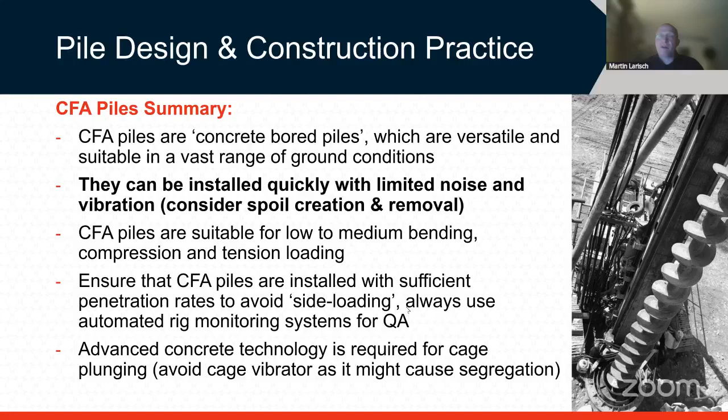A few slides about driven piles before we get into pile testing. Driven piles are usually cheaper than bored piles, with a wide variety of materials and shapes, better quality control for structural strength, little spoil for removal and disposal during installation, and they may increase the soil around the pile during driving.

We need a bit of advanced planning, allow for stresses during transport and installation. Specialized splices may be required, and we will have noise and vibration. There's no way around it, unfortunately.

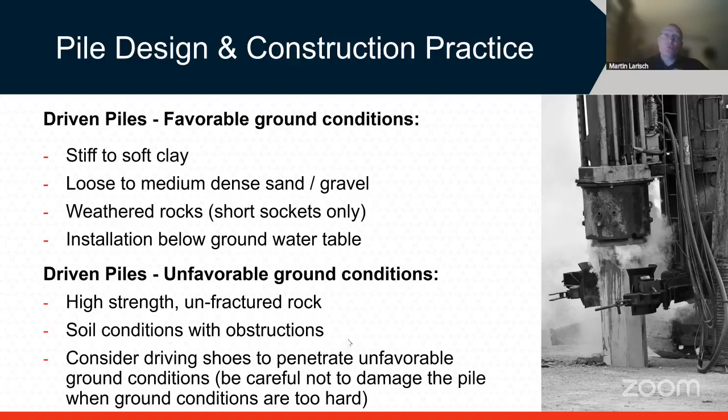They're suitable basically in all types of soil conditions, weathered rocks with short sockets, and of course below the groundwater level. Unfavorable in high strength unfractured rock - we will just break the pile. Soil conditions with obstructions, and sometimes we can use driving shoes to penetrate harder layers. In general, all types of structures can be used, very often for marine piles, bridges, buildings, ranging from as small as 250 to 450 mil in diameter for steel piles.

Very, very different applications possible. We can do raked piles easily. I've done 1-in-1 piles for some marine jobs, but very, very versatile.

Drivability analysis is very important. If we have excessive driving stresses, we may damage the pile head or bottom. It's not always possible, but we should think about hammer selection, and a bigger hammer is often the better solution. Early on, I mentioned 1 or 2% of your test load or your ultimate driving load. That's a good selection.

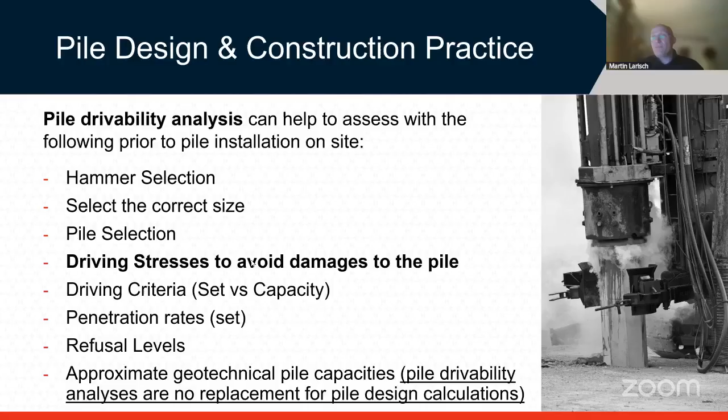Select your driving criteria. We'll talk about the Hiley formula in a few minutes, or PDA testing, dynamic pile testing. Define your refusal level. Usually we say 2.5 millimeters per blow or 25 millimeters over 10 blows, averaging it out. That's quite important. We can use hydraulic hammers, drop hammers, air hammers, and diesel hammers. There's no right or wrong, whatever is available, they're just providing the energy.

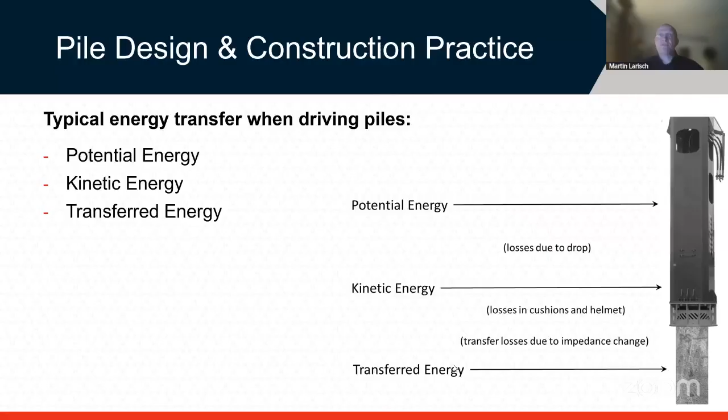What is more important is to understand that we're talking potential energy. That's the theory: my drop height multiplied with my weight. Then I have losses due to the drop, and this is my kinetic energy. When I have a cushion on top of my pile head, so the hammer doesn't break the concrete, I have losses in the cushion and the helmet, and then I have my transferred energy. Depending on my hammer type, hydraulic or drop hammer, my effective transferred energy can only be 60%, anything between 60 and 100%.

Some hammers drive steel to steel. Hydraulic, brand new hammers are usually around 80 to 95%, but can be as low as 60. For steam and air hammers, 40 to 70%, diesel hammers 30 to 60%, and rope-driven hammers between 20 and 80%. This is the biggest problem - they are not constant energy inputs. It depends on your hammer type, it depends on your friction.

With the Hiley formula, which turns 100 this year, it's been around for a long time, a very, very useful method. It's a verification tool, not a design formula. In the first bracket, you have your energy - it's your hammer weight multiplied with your drop height. Then there's the efficiency factor. With the efficiency factor, you can go wrong unless you measure it with PDA testing.

Then you can basically correlate a site-specific relationship for a site, and divide it by your set and half of your temporary compression. Your temporary compression is basically your pile bouncing back, and the set is how much it penetrates permanently in the ground per blow. So your temporary compression is usually the elasticity of the pile, elasticity of the soil - it's called the quake of the soil.

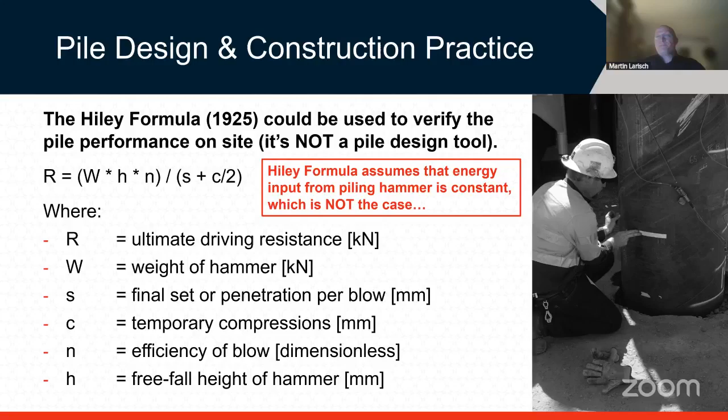Yeah, these are the main components.

We want to talk about pile setup. In particular in cohesive soils, if you drive piles, you have an excessive buildup of pore water pressure, because when your pile penetrates, your pore water can't escape quick enough. So you may get very high pore water pressure, and that will decrease the shear strength.

If you drive your pile in clay and do, for example, a dynamic load test the same day, you will not get your final design strength. Very, very unlikely. This can cause a lot of problems, irritating questions from the client and phone calls. So you have to wait, ideally 2 weeks, depending on your ground. If it's plastic clay, 2 weeks. If it's sandy clay, maybe a week. For another soil, maybe two days.

But you have to do a restrike, test it again. It could be Hiley, doesn't have to be PDA. But if you test it after a few days or a week, take your first few blows - don't redrive the pile, because then you increase the pore water pressure again and have the same problem. The first few blows, you will find that your setup effects give you a much higher pile resistance.

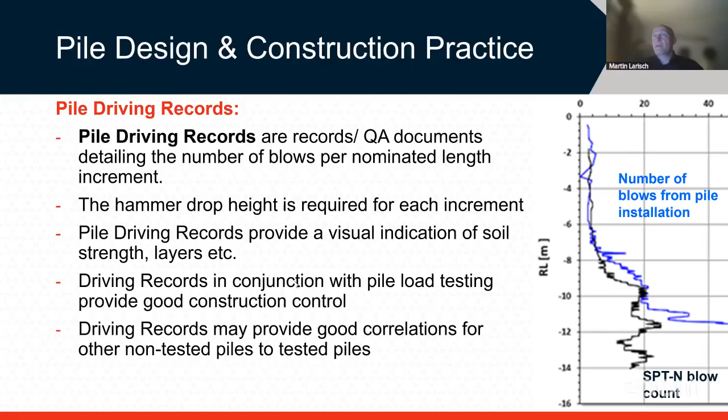All right, summary: noise and vibration effects need to be considered - they are potentially an issue. Selection of pile driving hammers is important. Setup effects need to be considered.

Again, at end of drive, particularly in clay soils, it's unlikely you achieve your full resistance. In some instances, the client says no, we can't afford that, we have to keep going. Then do load tests or use your Hiley formula, and you basically over-design your piles, because they may provide only 50 to 80% of their initial resistance after end of drive until the setup occurred.

Predicting setup is very, very difficult. We use ranges between 1.2 to 2.5 or something like that - so how long is a piece of string? It's very difficult to assess, unless you measure it.

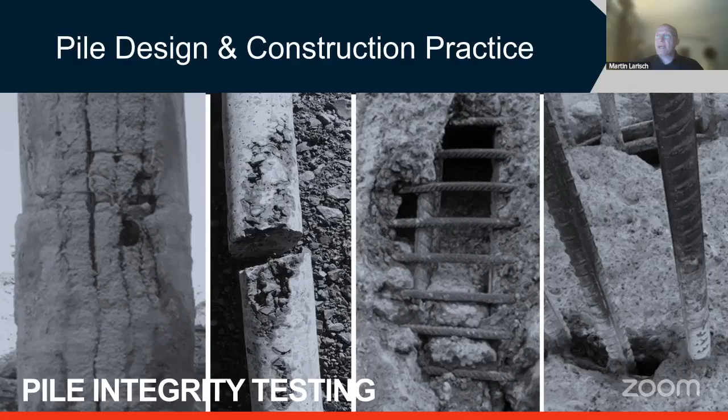It provides a graphical display, velocity records, and usually we take 3 impacts and they're averaged. Never go settle with one - we want to have an average.

It was optimally developed for piles up to 1.2 meters in diameter. We've tested 3 meter piles, but this is the optimal range - for slender piles with a length to diameter ratio less than 30 and in stiff to medium dense soil. This is where it works best, though it also works in other conditions.

Preparation of the pile head is very, very important. You see on the right hand side, a really nicely prepped pile head. If it's not prepared well, you may get results that may not be reliable.

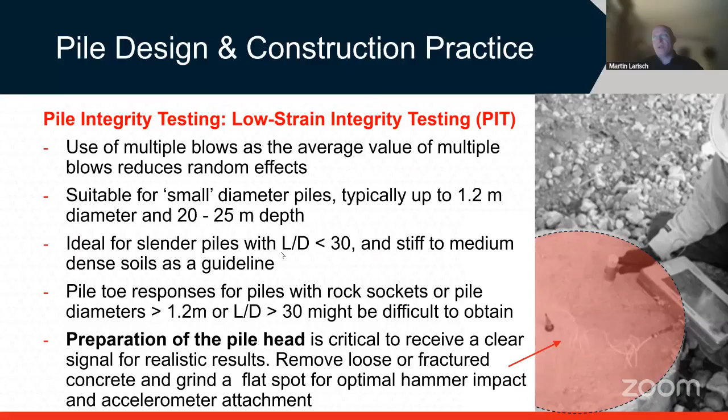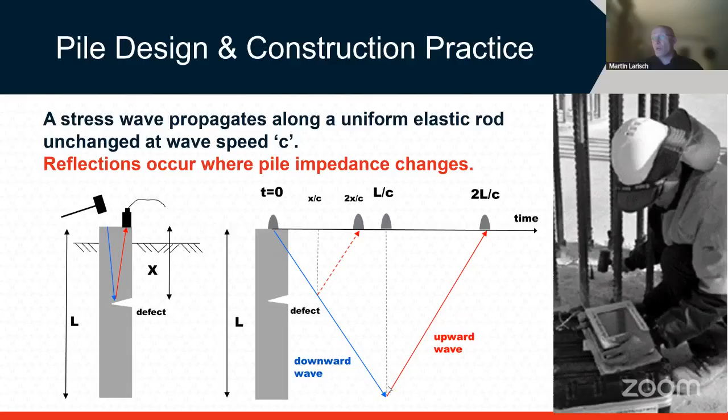So this is basically PIT testing, or low strain integrity testing, or the hammer pulse method. If we have defects like cracks, the wave may be deflected because it can't penetrate the crack, and partially it can get along on the left-hand side, but it will also be reflected. So if we look at the right-hand side, some parts of the wave go down and another part gets reflected. We get an earlier signal that gets higher up.

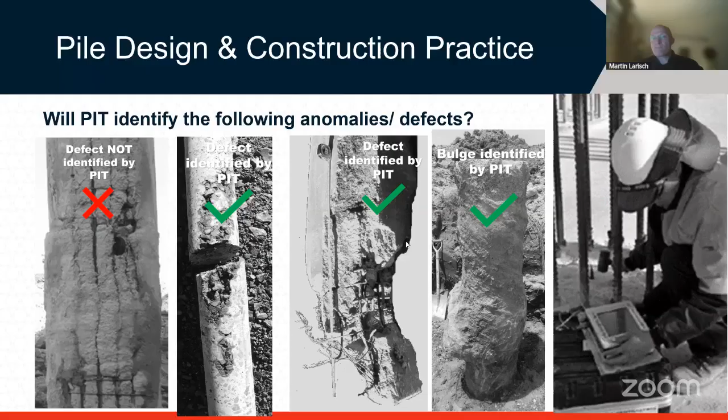It's just an indicative assessment of necking and bulging, and identification of severe or major defects like full diameter cracks and large inclusions. We can't have a detailed assessment of necking and bulging, or of the pile diameter, and any minor cracks or inclusions may be missed.

Not sure what it's related to.

The last question - how do you see thermal integrity testing compared to sonic logging? We'll talk about thermal integrity in a few minutes. It's relatively new - we don't understand everything, but we understand a lot. It's a good alternative. I'll talk about that in 5 minutes.

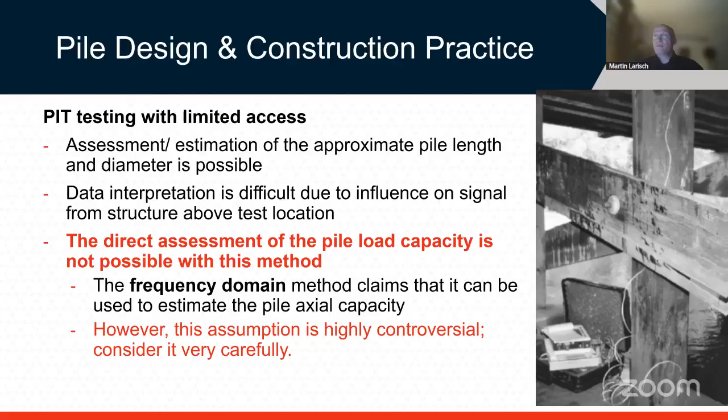Another test is cross-hole sonic logging. For example, for bored piles, if the pile diameter gets bigger, we use cross-hole sonic logging. It's also non-destructive - we attach 50 millimeter tubes on the inside of the reinforcement cage, install the pile, pour it, and then fill these tubes with water and lower probes down.

One receiver and one sender, and then we basically do a cross-hole sonic log of the pile shaft inside the reinforcement cage. Usually this is for 600 millimeter diameter piles and upwards, otherwise it gets too congested and you can't get your tremie pipe in. You want to have at least 4 tubes installed.

You measure the time between pulse generation and signal reception - that's your first arrival time - and you measure the strength of the received signal. So if there's a bentonite inclusion in between, your wave speed is different. It penetrates through the concrete, then through the bentonite inclusion, then through concrete again, and you also lose energy, which you will see.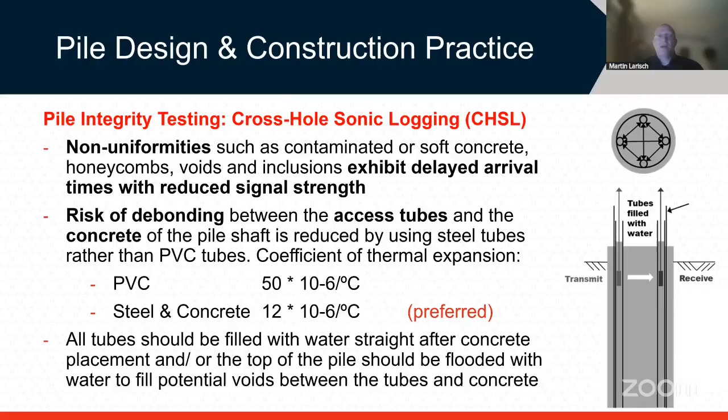There's a risk of debonding, which is why we prefer steel tubes because of the coefficient of thermal expansion. All these tubes need to be filled with water straight away. Ideally we flood the pile head before testing because sometimes the concrete debonds from the tubes, particularly in the top few meters. If there's air in between, we get funny results, but water in there helps with wave transmission.

So this is how it looks. On the right hand side we have the transmitter and receiver, with the transmitted signal and transit time, and the received signal. In the middle we see our arrival time - a nice straight line, no issues there - and our energy, a bit of zigzag but not too bad, looks all right. Sometimes we see indication of a potential defect at the top.

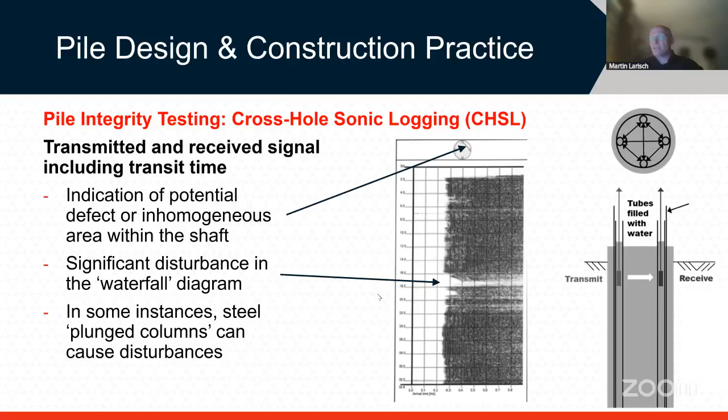This is basically 4 tubes, from the tube at the top to the tube on the right hand side. We see significant disturbance here - we call this a waterfall diagram. Between 16 and 18 meters, something is going on.

If we investigate further, there's a large deviation of more than 20% in the first arrival time - 20% less - and my relative energy drops at the same time by about 50%. So we did concrete coring and detected an inclusion inside the pile caused by a bentonite inclusion. The bentonite fluid wasn't cleaned properly, and that was the problem.

Then there's this rating guide. If, for example, I get more than 20% deviation based on these diagrams, I can go back and determine my rating. Category A means no significant defect - that means my first arrival or relative energy is between 0 and 9 decibels, whatever this thing measured, and my first arrival time delay is less than 15%. Otherwise I'll move to the yellow category.

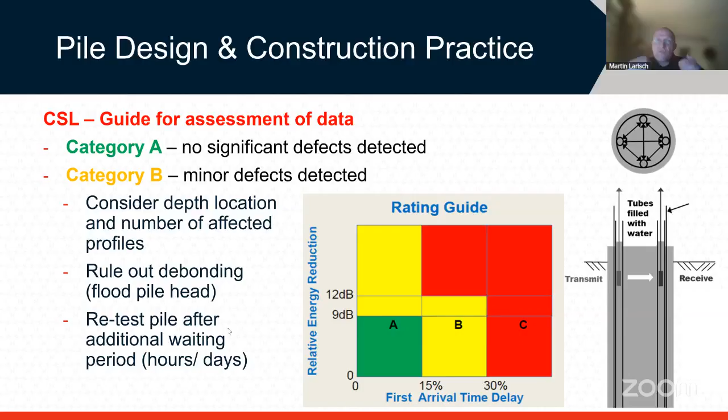Depending on relative energy reduction or first arrival time, this could be minor defects. Consider the depth location, rule out debonding, so flood the pile head again and retest after additional waiting. If it still doesn't work, it may be category C. Then we have to excavate if it's near the ground surface. We have to do some core drilling, maybe do another PIT test, and maybe repair defects or replace the pile. This is when it gets tricky.

Again, if we look at different defects, any defects in the cover zone can't be detected with this method. This is critical to know, so we wouldn't see that. We do the test, and then we dig the pile out, we see this, and the client says, oh, why did I pay so much money? Because that's a test limitation.

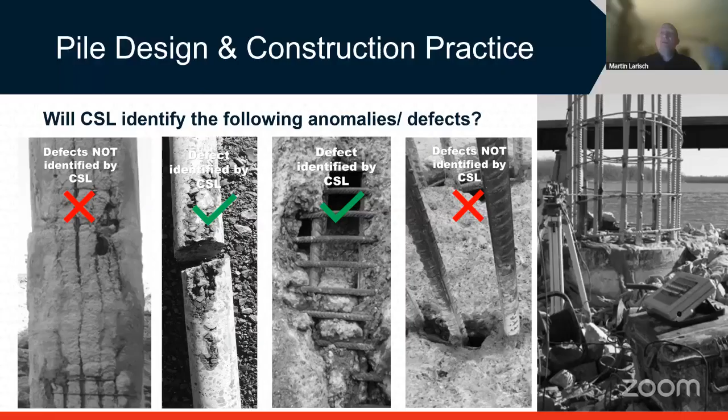The middle defect, the second one from the left, was identified. The big void inside the pile was also identified because it was located within the reinforcement cage. But on the right-hand side, these bleeding lines between the reinforcement cages were not detected. We did cross-hole sonic logging because the tubes were installed inside the reinforcement, and it wasn't detected. If we had installed them outside, the steel reinforcement cage would have been an obstruction. So this is a significant limitation because we only measure the concrete inside. It's only an indicative assessment of necking and bulging.

Waiting is quite important. So day 1, 2, 3, and 4, and it was a high-rise building job. The client pushed us to test after the first day. It looked horrible, lots of energy losses, but the concrete needs to harden and get its final E modulus. So we saw after day 4 it looked better. ICE and AS2159 propose to wait at least 7 days. Not sure about the American standards, but yeah, give it 7 days.

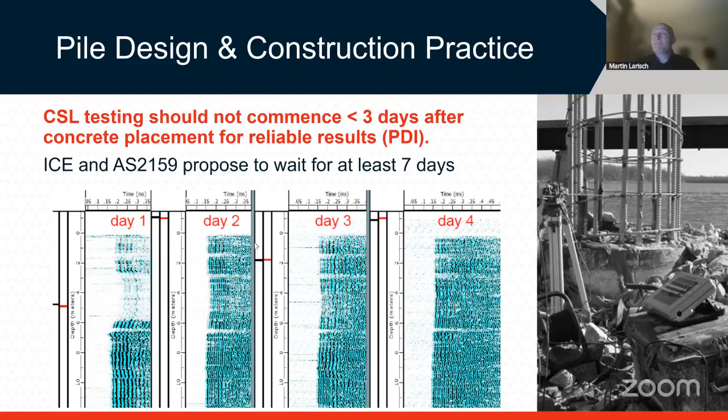Thermal integrity profiling is the last one I want to introduce. It evaluates the concrete cover inside and outside the reinforcement cage. We can evaluate as early as 12 hours after concrete placement. What we do is measure the concrete temperature - we have little thermocouples along the reinforcement cage, and we get this temperature profile. It's very, very useful.

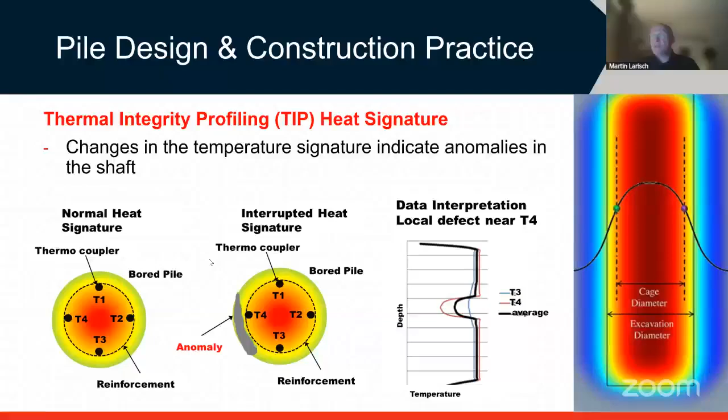For example, if we have any inclusions, we have 4 thermometers and we have an anomaly on the left-hand side at T4. We see that the temperature at this depth at T4 changes, and then we can say there may be some issue with the cover zone or something like that. This is a new technology - just used it on a recent job, a bridge job, and it evaluates concrete quality and cover.

Usually we have to do the measurements during concrete setting. We can assess the shape of the pile shaft and detect significant defects across the pile shaft - most cost efficient, really, really cost efficient. There's no risk of debonding of the pipes, and contractors like it because they don't have to attach all these tubes. But the method is new and has limited track record globally. Probably in the US they've done the most. Australia has done a few, but I think the rest of the world is trying to catch up.

There's a lack of international publications. What happens if your concrete temperature is 63 degrees for one part, and for the other it's only 58? How do we deal with these things? We need pre-planning. It also won't detect small defects, and testing is only possible during early curing - we can't revisit it, we can't say we'll do another test because we found an area. We have to do coring or other things instead. Again, it may not be available in all regions globally.

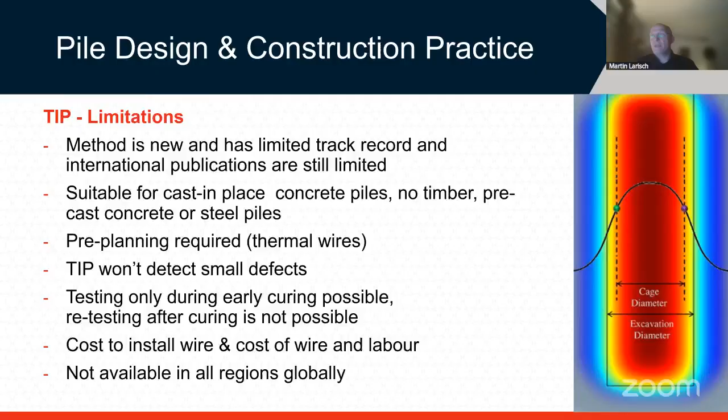Bit of a summary: with all these testing methods, we can only assess major defects. TIP may assist with concrete cover in particular. They're all pretty robust and really suitable to detect major defects, but not really good at assessing small details.

Pile load testing - basically we want feedback for the pile designer about load displacement behavior. We spoke about the strength reduction factor. There are different tests: we can do static testing, which is very slow, and we actually measure the displacement. We've seen static load testing curves earlier.

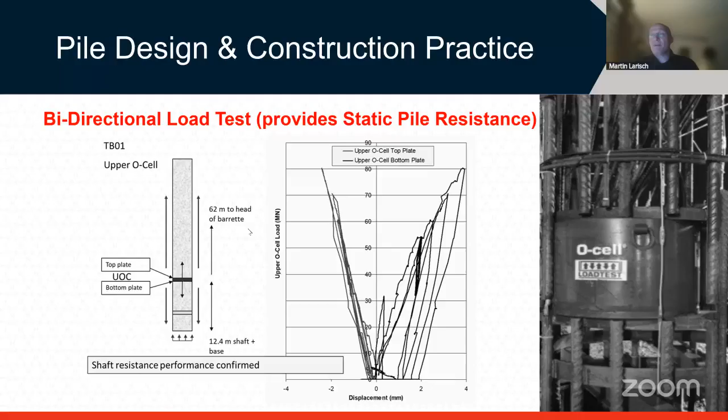Dynamic load testing, not too dissimilar to PIT testing - we hit the pile with a hammer, mobilize it probably 2 or 3 millimeters, and send this compression wave down. It gets reflected, and from this reflected wave we get force and velocity data, which we put into CAPWAP, a signal matching program, to get these load displacement curves. So we're basically transforming a dynamic pile resistance into the static resistance using CAPWAP.

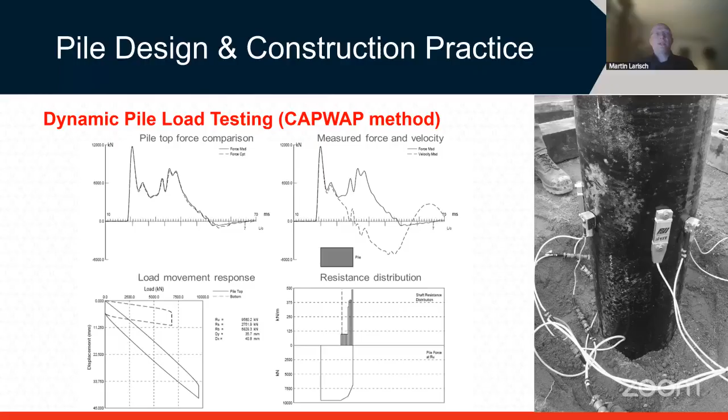A PDA is basically just a data collection process where we hit the pile. We're interested in the upward wave, put that into wave matching, and get an estimate - this is the biggest difference. Dynamic pile load testing is an estimate, very accurate if the interpreter is experienced, but with static load testing we get a real number - we apply a real load and get a real measurement.

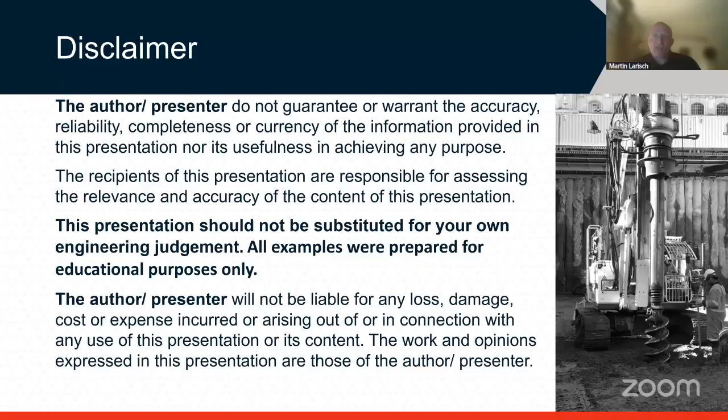We can also test loaded piles using a testing frame or hammer weight, about 2% of the test load. That's basically it - that was 3 minutes, apologies, I had to rush through the last few slides a little bit, but that's basically the end of the lecture. And there's probably some time to go through the questions.

How do you see conducting thermal integrity tests over sonic? I think hopefully I responded to that - it's another method, probably worth combining on a job to help get more data.

I have a 3,000-ton load test with a Kentledge platform. That could be a record for static test. I don't know, it's a big test. Congratulations, but it could be a record. I know in Singapore they probably will claim they've done more, but I haven't done a lot of Kentledge, though it sounds like a fantastic test load.

We went through it - I go from the bottom up to match N values. You showed how much energy the impact hammer used, or with this, I don't know. That was just an example from a job, but again, it's worth correlating that on a project-specific basis. So that was just an example.

I think you answered most of the questions. Let's go at the top - the question is from Miss Kin. She's asking: for cohesive soil with low permeability, including fine particles and tight pores, can we reduce seepage of the foundation for supporting pile foundation as ground improvement? Single pile or group pile, which is more effective? Let me know.